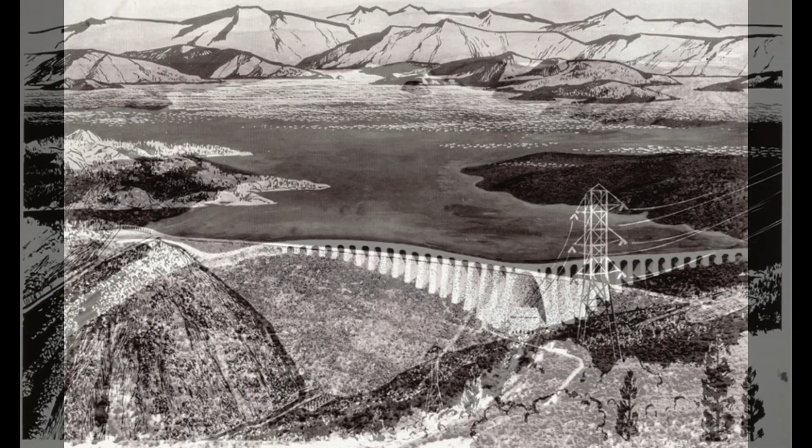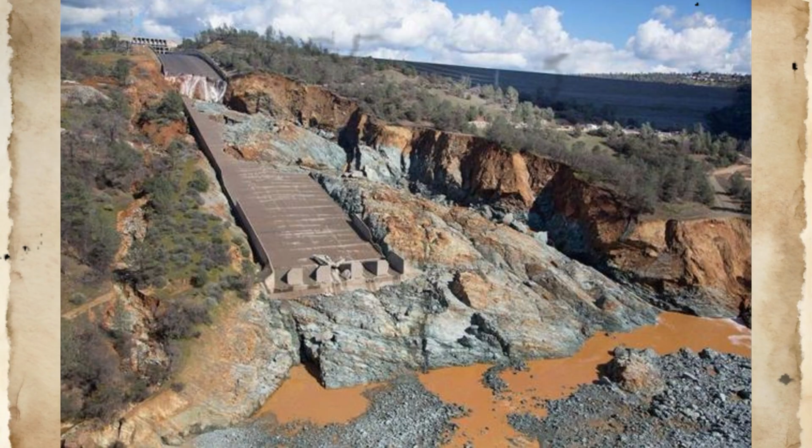The Oroville spillway had been constructed according to standard practices, concrete slabs placed over prepared bedrock, with drainage systems designed to relieve uplift pressures. These design assumptions, that subsurface drainage would remain functional, that bedrock preparation would prevent infiltration, that hydraulic forces would remain confined to surface channels, had governed construction decisions and operational protocols for 50 years.

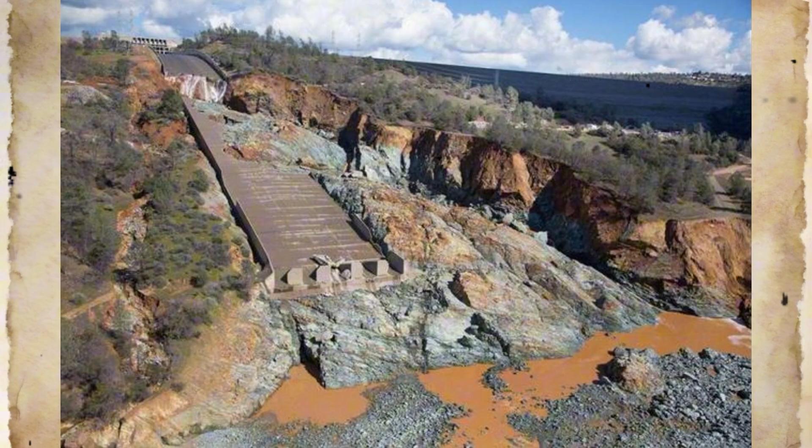But spillway concrete, like all infrastructure, ages. Joints develop microscopic separations. Drainage systems accumulate sediment. Water, under pressure and given sufficient time, exploits every available pathway.

When spillway discharge reached levels not seen since construction, water behavior departed from the controlled, surface flow that designers had modeled. The evacuation was ordered not because the dam would fail, but because water had begun rewriting the rules that governed spillway performance. How does infrastructure designed to prevent disaster become the mechanism that triggers it?

The Oroville Dam spillway system emerged from a specific engineering philosophy that dominated American dam construction in the 1960s. Flood control through massive concrete structures that could safely channel extreme water volumes while maintaining reservoir operations.

When California's Department of Water Resources began designing what would become the nation's tallest dam in 1957, the spillway represented the critical interface between controlled storage and uncontrolled discharge, a concrete pathway that would allow operators to prevent catastrophic overtopping by releasing water at rates up to 270,000 cubic feet per second.

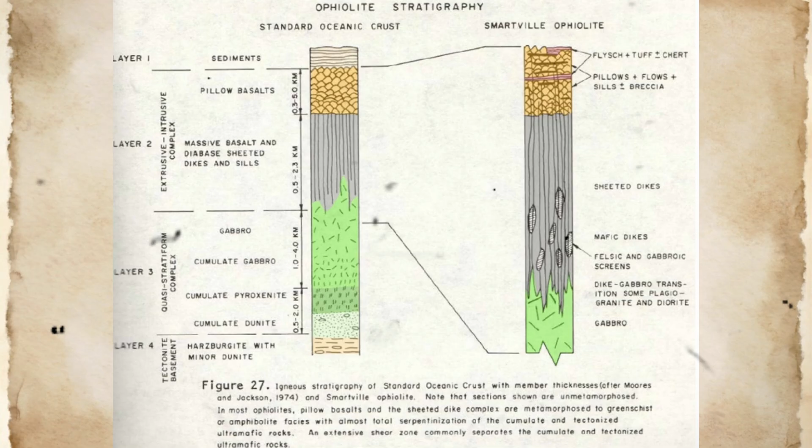The spillway's design reflected established Bureau of Reclamation principles that had governed major dam construction since the 1930s. Water would enter through radial gates controlled from a service bridge, flow down a concrete-lined chute inclined at carefully calculated angles, and dissipate energy in a stilling basin before rejoining the Feather River.

This approach assumed that concrete, properly placed over prepared bedrock, would contain hydraulic forces indefinitely. The design premise was straightforward. Water would remain on the surface of the spillway, following predetermined flow paths, with any uplift pressures safely relieved through engineered drainage systems embedded within the concrete structure.

The spillway chute itself extended 3,000 feet from the dam's outlet structure to the river below, dropping 730 feet in elevation. Engineering calculations determined that the chute required a specific concrete thickness, typically 12 to 18 inches, over a foundation of carefully prepared rock.

The bedrock beneath the spillway consisted of what geologists in the 1950s classified as metavolcanic rock, later redesignated as the Smartville ophiolite, a formation of weathered volcanic material that had undergone significant chemical alteration over geological time.

Critical to the spillway's function was an extensive drainage system designed to prevent water from accumulating beneath the concrete slabs. Herringbone patterns of terracotta drain pipes were embedded within the spillway structure, positioned just 5 to 6 inches below the concrete surface. These drains served a dual purpose.

They prevented uplift pressures from developing under the concrete during spillway operation, and they provided a pathway for any water that might penetrate the concrete surface to exit safely without compromising structural integrity. The design assumed several conditions that would prove critical to understanding the 2017 failure.

First, engineers expected that the concrete-to-bedrock interface would remain watertight, preventing significant subsurface water infiltration. Second, the embedded drainage system was expected to function indefinitely, providing reliable pressure relief throughout the spillway's operational life.

Third, the underlying bedrock was assumed to be sufficiently competent to support the concrete structure without degradation, despite geological evidence indicating the presence of weathered rock layers, or saprolite, in the spillway foundation area.

Spillway operations were governed by precise hydraulic calculations that determined safe discharge rates based on reservoir levels and downstream channel capacity. Operators relied on established protocols that prioritized gradual water releases to prevent sudden flow increases that might damage downstream infrastructure or endanger river communities.

The spillway gates could be operated individually or in combination, allowing operators to fine-tune discharge rates based on hydrologic conditions and flood control requirements. The operational philosophy emphasized predictability and control.

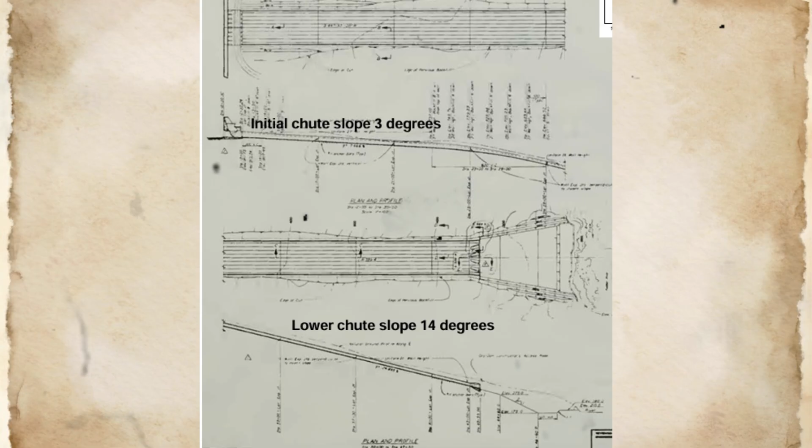Spillway flows were expected to behave according to well-understood hydraulic principles, with water velocities, depths, and energy dissipation occurring within calculated parameters. This predictability was essential for safe operation, as spillway discharge directly affected river levels, power generation at downstream facilities, and flood protection for communities throughout the Feather River Basin.

During normal operations, the spillway remained dry except during flood control releases or scheduled maintenance flows. This design choice reflected standard practice for flood control spillways, where structures remained inactive for extended periods between high water events. The assumption was that concrete structures could withstand both wet-dry cycling and the thermal stresses associated with intermittent use

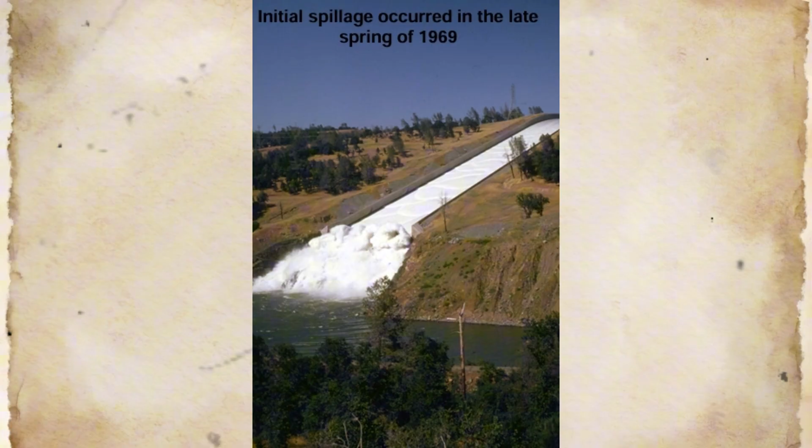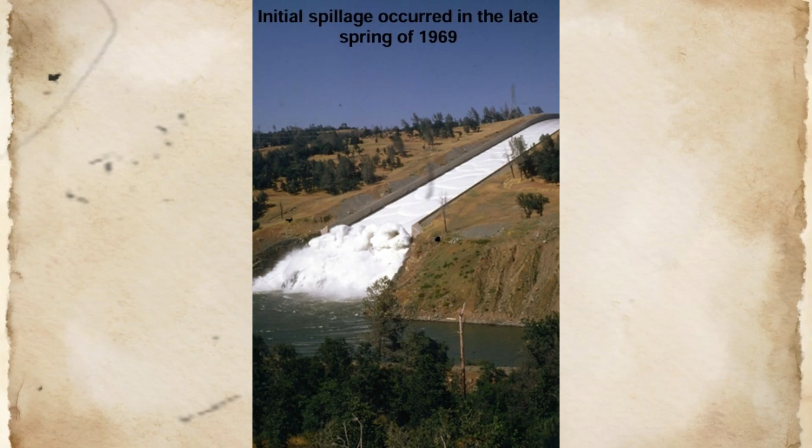without significant degradation. The spillway's auxiliary components included a separate emergency spillway, designed to operate only during extreme flood events when the main spillway reached capacity. This ungated structure consisted of a concrete weir that would allow water to flow over natural hillside terrain in a controlled manner. The emergency spillway represented a backup system, designed to prevent dam overtopping by providing an additional discharge pathway that could handle flows exceeding the main spillway's design capacity.

Instrumentation for monitoring spillway performance focused primarily on hydraulic parameters, flow rates, water levels, and gate positions. The system included limited provisions for monitoring the structural condition of the spillway chute itself. This instrumentation philosophy reflected the prevailing assumption that properly constructed concrete would perform reliably for the structure's design life without

requiring continuous structural monitoring. The spillway design incorporated safety factors intended to accommodate uncertainties in hydraulic loading, concrete performance, and foundation conditions. These factors were based on engineering judgment and experience with similar structures, rather than on comprehensive testing of the specific materials and conditions at Oroville. The safety margins were considered adequate for the range of operating conditions anticipated during the spillway's design life.

However, the design process occurred before modern understanding of several critical factors that would later prove relevant to spillway performance. In the 1960s, engineers had limited knowledge of alkali aggregate reactions in concrete, the long-term effects of wet-dry cycling on concrete durability, and the behavior of drainage systems subjected to decades of sediment infiltration. The design also preceded current understanding of how weathered volcanic rocks respond to sustained hydraulic loading and thermal cycling.

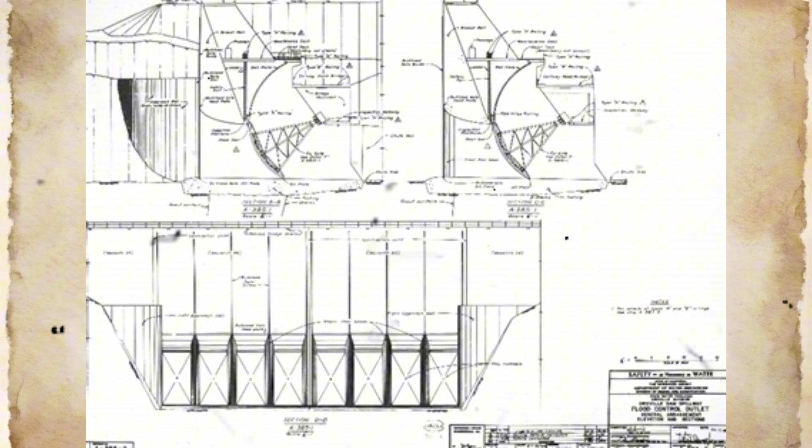The spillway's construction occurred between 1965 and 1968, during a period of unprecedented dam building activity in California. Quality control procedures followed established practices, with periodic testing of concrete strength and inspection of reinforcement placement. However, construction documentation from this period reveals limited attention to the long-term performance of embedded drainage systems or the detailed characterization of foundation rock properties below the prepared surface.

The completed spillway represented state-of-the-art flood control engineering for its time, incorporating established design principles and construction techniques that had proven successful at numerous other facilities. The structure met all applicable design standards and regulatory requirements, with approval from multiple engineering review boards and consulting panels assembled specifically for the Oroville project.

This design framework created the operational environment that would govern spillway performance for nearly 5 decades. Operators would make decisions based on hydraulic calculations that assumed structural integrity, while structural engineers would evaluate performance based on hydraulic loading assumptions that assumed predictable flow characteristics. The spillway system represented a carefully balanced engineering solution that depended on the continued validity of fundamental assumptions about concrete durability, foundation stability, and drainage system performance.

The implications of these design assumptions would not become apparent until February 2017, when prolonged spillway operation under conditions not encountered since the structure's completion would reveal the gap between design intent and physical reality. The spillway had been designed to handle water. It had not been designed to reveal what time, weather, and accumulated wear had done to the hidden infrastructure that made safe water handling possible.

The spillway system that operators inherited in 1968 contained vulnerabilities that would remain hidden for decades, embedded within design choices and maintenance practices that appeared entirely reasonable at the time of implementation. These latent conditions did not represent failures of engineering judgment, but rather the inevitable accumulation of small compromises and unexamined assumptions that would eventually align to create pathways for catastrophic failure.

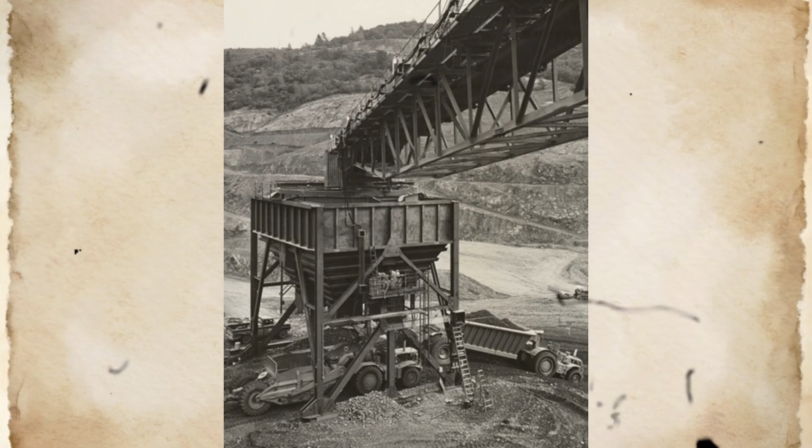The most significant latent condition involved the spillway's drainage system, which had been installed during construction with terracotta pipes positioned just inches below the concrete surface. These pipes, arranged in herringbone patterns throughout the chute, were designed to intercept any water that might penetrate the concrete and channel it safely away from the structure. However, the drainage system's effectiveness depended on maintaining clear flow paths over operational timeframes that exceeded the experience base of

any existing spillway. By the 1980s, routine inspections began documenting evidence of drainage system degradation. Sediment infiltration had partially blocked some drain outlets, reducing the system's capacity to relieve uplift pressures. More concerning, chemical analysis revealed that some terracotta pipes were experiencing material degradation due to prolonged exposure to alkaline conditions created by concrete chemistry. The pipes were slowly dissolving, creating void spaces within the spillway structure that operators could not directly observe.

This drainage system deterioration created a hidden vulnerability that contradicted fundamental design assumptions. Engineers had calculated spillway safety factors based on the assumption that uplift pressures would be reliably relieved through functional drainage. As drainage capacity decreased, the actual safety margins were being eroded in ways that could not be detected through surface inspection or standard hydraulic monitoring.

Maintenance procedures during the spillway's operational life focused primarily on concrete surface repairs and gate mechanism servicing. These activities followed established protocols for dam maintenance, emphasizing visible components and mechanical systems that could be tested and verified. However, the embedded drainage system lay beyond the reach of routine maintenance, accessible only through expensive and disruptive excavation that was never authorized during the spillway's first 4 decades of operation.

The maintenance philosophy reflected broader organizational assumptions about concrete infrastructure durability. Concrete structures were expected to provide decades of reliable service with minimal intervention, a belief supported by experience with other major dams constructed during the same period. This confidence in concrete permanence discouraged intensive investigation of subsurface conditions, particularly when surface inspections revealed no obvious signs of distress.

Organizational factors within the California Department of Water Resources further contributed to the accumulation of latent conditions. Budget constraints during the 1980s and 1990s led to deferral of comprehensive structural assessments that might have revealed drainage system problems earlier. Engineering staff turnover meant that institutional knowledge about construction details and early operational experience was gradually lost, replaced by procedural compliance that emphasized routine inspections over fundamental system evaluation.

The regulatory environment also shaped maintenance priorities in ways that inadvertently masked emerging problems. Federal guidelines for dam safety focused primarily on structural stability and flood control performance, with less emphasis on the detailed condition of auxiliary systems like spillway drainage. Compliance inspections verified that the spillway could discharge required flow volumes and that concrete surfaces showed no obvious cracking, but they did not mandate investigation of subsurface infrastructure condition.

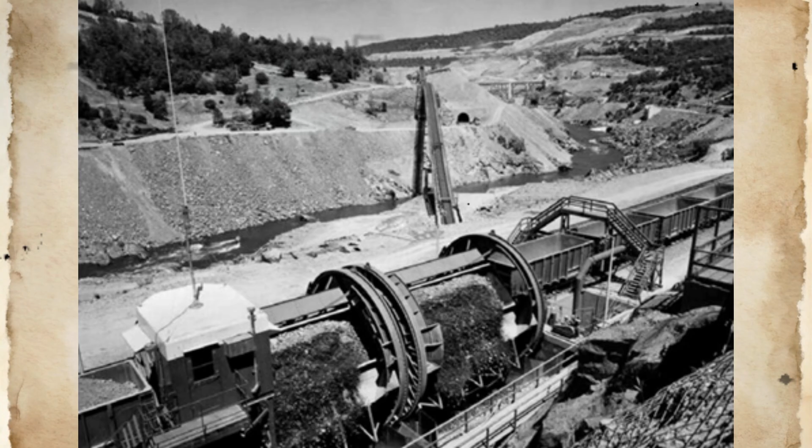The spillway's instrumentation system compounded these organizational limitations by providing extensive data on hydraulic performance while offering minimal information about structural condition. Operators could precisely monitor flow rates and water pressures, but they had no direct means of assessing the integrity of the drainage system or the condition of the concrete bedrock interface. This instrumentation bias reinforced the operational focus on hydraulic control while maintaining structural assumptions that were becoming increasingly questionable.

Documentation practices during routine maintenance activities inadvertently obscured evidence of emerging problems. Work orders typically focused on specific repair tasks rather than comprehensive condition assessment, creating records that captured individual symptoms without revealing systematic deterioration patterns. When maintenance crews repaired surface cracks or replaced concrete sections, these activities were documented as routine improvements rather than responses to underlying structural changes.

The spillway's design had also created a maintenance trap through its herringbone drainage system configuration. The intricate network of buried pipes made comprehensive inspection extremely difficult, while the system's distributed nature meant that partial blockages might not significantly affect overall spillway performance until deterioration became widespread. Operators could not easily distinguish between normal operational variations and the gradual degradation of critical subsurface infrastructure.

Seasonal operation patterns further masked the progression of structural deterioration. The spillway operated primarily during winter flood seasons, remaining dry for extended periods between high water events. This intermittent use pattern meant that emerging problems might not become apparent until spillway discharge reached levels that had not been sustained for years or decades. The wet-dry cycling also created thermal and chemical stresses that accelerated material degradation in ways that were poorly understood when the spillway was designed.

Professional culture within the dam engineering community contributed to delayed recognition of spillway vulnerabilities. Engineers naturally focused on demonstrated performance rather than speculative failure modes, particularly when structures had operated successfully for decades. The spillway's reliable flood control performance during major storms in the 1980s and 1990s reinforced confidence in the design approach, discouraging investigation of theoretical problems that had no obvious operational impact.

The accumulation of these latent conditions created a situation where the spillway's apparent reliability masked fundamental changes in its structural behavior. Surface inspections continued to show acceptable concrete condition, hydraulic performance remained within design parameters, and flood control operations proceeded according to established procedures. However, the hidden infrastructure that made this performance possible was gradually failing in ways that would not become apparent until extreme operating conditions exposed the accumulated degradation.

By 2017, nearly 50 years after construction, the spillway represented a complex system where original design assumptions no longer accurately reflected physical reality. The drainage system that was supposed to prevent uplift pressures had been compromised by decades of sediment infiltration and material degradation. The bedrock foundation that was expected to provide stable support had been altered by prolonged exposure to water infiltration and thermal cycling.

The concrete structure that appeared sound from surface inspection was underlain by void spaces and weakened interfaces that contradicted engineering calculations. These latent conditions had not triggered any obvious warning signs that would have prompted immediate corrective action. The spillway continued to perform its primary function of discharging flood flows, and routine inspections found no evidence of imminent failure. The hidden deterioration was only detectable through comprehensive subsurface investigation that had never been undertaken, due to cost considerations and confidence in the original design.

The stage was set for a failure mode that would combine hydraulic forces with structural vulnerabilities in ways that the original design had not anticipated. When sustained spillway operation finally occurred in February 2017, the accumulated effects of decades of hidden deterioration would interact with hydraulic loading to create conditions that overwhelmed the spillway's compromised structural capacity.

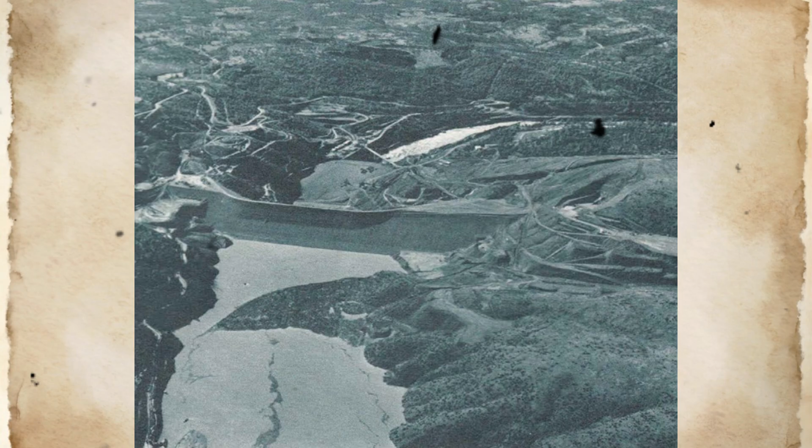The winter of 2016 to 2017 brought California unprecedented rainfall following years of severe drought. By late January 2017, Oroville Reservoir had risen from critically low levels to near capacity, forcing operators to begin sustained spillway releases for the first time since 1997. What appeared to be routine flood control operation would reveal the accumulated effects of decades of hidden infrastructure degradation.

On February 6, 2017, spillway operators began controlled releases at approximately 25,000 cubic feet per second to manage rising reservoir levels. Flow rates remained well within design parameters, and hydraulic conditions appeared entirely normal. Water entered through the radial gates, accelerated down the concrete chute, and dissipated energy in the stilling basin exactly as engineering calculations predicted. Surface observations revealed no unusual conditions, and operators had no reason to suspect that anything other than routine flood control was occurring.

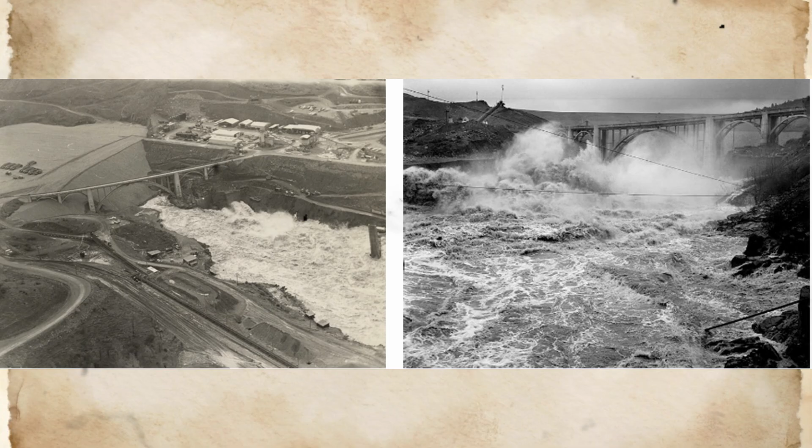However, beneath the spillway's concrete surface, conditions were departing significantly from design assumptions. The sustained flow was creating hydraulic pressures that the compromised drainage system could no longer adequately relieve. Water began infiltrating through concrete joints and microcracks that had developed over decades of thermal cycling and chemical exposure. This infiltration process was invisible to operators, who had no instrumentation capable of detecting subsurface water accumulation.

The infiltrating water encountered foundation conditions that differed substantially from what engineers had assumed during design. Instead of competent bedrock capable of supporting the concrete structure indefinitely, the water reached layers of saprolite, weathered volcanic rock that had been chemically altered by geological processes over millions of years. This material, which appeared stable when dry, became highly erodible when saturated and subjected to hydraulic pressure.

For several days, spillway operation continued without obvious incident. Operators maintained discharge rates according to established flood control protocols, responding to rising reservoir levels by gradually increasing flow through additional gate openings. The spillway appeared to perform exactly as designed, handling increasing water volumes while maintaining controlled downstream releases. Hydraulic monitoring showed flow rates, velocities, and energy dissipation occurring within expected parameters.

The divergence between apparent performance and actual structural condition became critical on February 7, when operators increased spillway discharge to approximately 52,000 cubic feet per second. This flow rate, while still well below the spillway's design capacity, created hydraulic conditions that had not been sustained since the structure's completion in 1968. The increased discharge generated higher pressures throughout the spillway system, including uplift pressures beneath the concrete that the degraded drainage system could not adequately manage.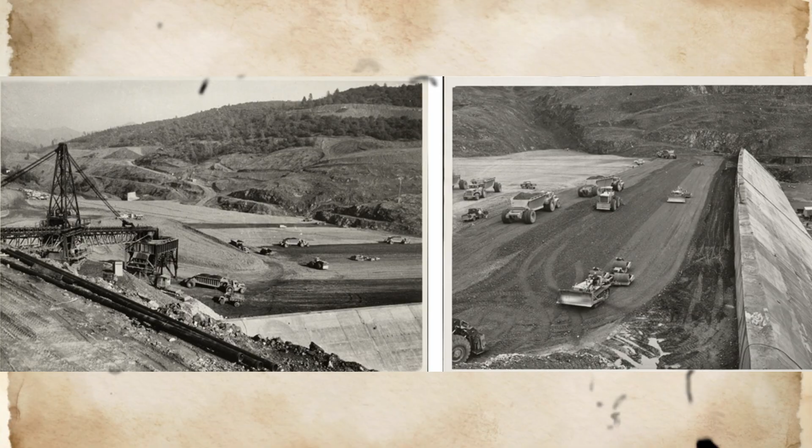Continuing operation might worsen whatever structural problem was developing, but shutting down the spillway would force reservoir levels higher, potentially requiring use of the untested emergency spillway. At 11:55 a.m. on February 7th, operators made the decision to shut down the main spillway to allow detailed inspection of the observed anomaly. This decision reflected prudent caution based on available information, but it also initiated a sequence of events that would reveal the full extent of infrastructure deterioration.

When spillway flow ceased, the true scale of subsurface erosion became visible for the first time. The sudden cessation of water flow exposed a massive crater where concrete had been undermined and foundation material had been eroded away. The crater extended approximately 300 feet in length and 170 feet in width, reaching depths of up to 40 feet below the original spillway surface. The scale of the erosion indicated that subsurface deterioration had been progressing for some time before becoming visible, hidden by the flowing water that had masked the developing cavity.

More alarming was the discovery that the erosion had extended well beyond the concrete spillway structure itself, penetrating deep into the hillside that supported the spillway chute. The eroded material included not only saprolite foundation layers, but also structural fill that had been placed during original construction. This extensive erosion suggested that the spillway's structural integrity had been fundamentally compromised in ways that could not be quickly repaired. The crater's configuration revealed the mechanism of failure with stark clarity.

Water infiltration through degraded concrete joints had reached the saprolite foundation, where sustained hydraulic pressure had initiated progressive erosion. The compromised drainage system had been unable to intercept this infiltration, allowing water to accumulate at the concrete-bedrock interface where it generated uplift pressures that exceeded structural capacity. Once erosion began, the flowing water accelerated the process by removing material and creating increasingly large void spaces beneath the concrete.

Inspection of the exposed crater also revealed evidence that the failure process had been developing gradually, rather than occurring suddenly. Multiple layers of eroded material showed distinct stages of deterioration, indicating that foundation erosion had been progressing through successive wet seasons without detection. The final catastrophic exposure represented the culmination of a process that had been undermining spillway integrity for an extended period.

The implications of this discovery extended far beyond the immediate structural damage. The spillway failure had occurred during relatively modest flood conditions, at flow rates representing only a fraction of the structure's design capacity. This suggested that the spillway's actual structural capacity had been reduced far below design assumptions through the accumulated effects of infrastructure degradation. More critically, the failure had developed without triggering any of the monitoring systems or visual indicators that operators relied upon to assess spillway condition.

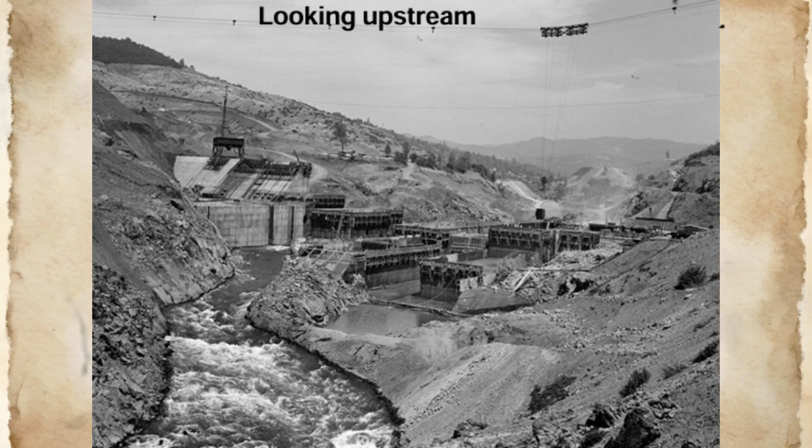Operations staff now confronted a situation that had not been anticipated in any emergency procedure. The main spillway was structurally compromised and could not safely operate, but reservoir levels continued rising due to ongoing storm inflows. The emergency spillway, which had never been used and was not designed for sustained operation, represented the only remaining option for reservoir control. However, activating the emergency spillway would create new risks, as this auxiliary system had its own limitations and potential failure modes.

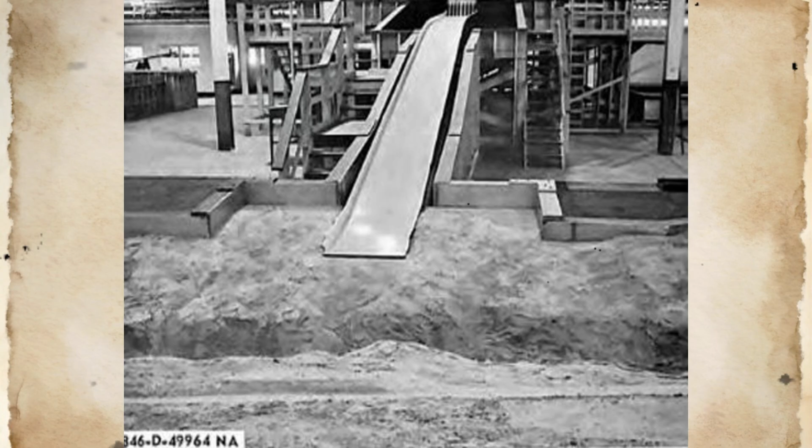The divergence between operator expectations and physical reality was now complete. The spillway that had appeared to function normally just hours earlier was revealed to be structurally compromised beyond immediate repair. The infrastructure that operators had trusted to provide reliable flood control had been silently degrading for years, maintaining an appearance of competence while losing the capacity to perform safely under sustained loading. The failure exposed not just physical deterioration, but the inadequacy of inspection and monitoring systems that had failed to detect the progressive loss of structural integrity.

The massive crater exposed by the spillway shutdown revealed a failure mechanism that contradicted fundamental engineering assumptions about concrete infrastructure behavior. The erosion pattern provided forensic evidence of how water infiltration, foundation deterioration, and structural uplift had combined to create catastrophic undermining that remained invisible until the moment of exposure. Understanding this failure chain required reconstructing the physics of progressive deterioration that had been developing beneath the spillway surface for decades. The failure originated at the interface between concrete and bedrock, where design assumptions about waterproof bonding had proven incorrect over operational timeframes.

Concrete placement during the 1960s had followed standard procedures for achieving adhesion to prepared rock surfaces, but these procedures did not account for the long-term effects of thermal cycling, chemical exposure, and micro-movement that gradually compromised the bond integrity.

Seasonal temperature variations caused differential expansion between concrete and rock, creating microscopic separations that allowed water infiltration during subsequent spillway operations. This infiltration process accelerated during periods of sustained spillway discharge, when hydraulic pressure forced water into any available pathway

through the concrete structure. The compromised drainage system, originally designed to intercept such infiltration, had been rendered ineffective by decades of sediment accumulation and terracotta pipe deterioration. Instead of being safely channeled away, infiltrating water accumulated at the concrete-rock interface where it generated uplift pressures that the original design had assumed would never occur.

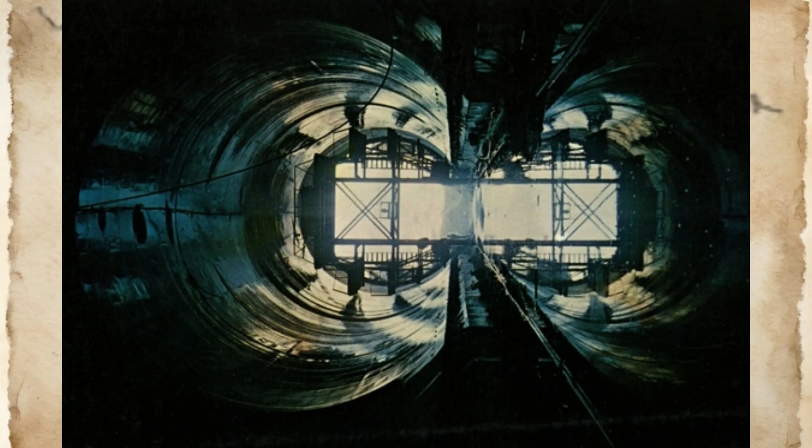The bedrock beneath the spillway consisted of saprolite, developed from the Smartville ophiolite, a geological formation that exhibited dramatically different properties when saturated compared to its dry state. During design and construction, this material had appeared competent and stable, supporting engineering confidence in long-term foundation performance.

However, when subjected to sustained hydraulic pressure from accumulated infiltration, the saprolite became highly erodible, losing structural integrity through chemical dissolution and particle transport. The erosion mechanism followed a predictable progression once critical conditions were established.

Water infiltration created hydraulic pressure at the concrete-saprolite interface, initially causing minor material displacement in the most chemically altered zones. As small amounts of saprolite were removed, the resulting void spaces allowed greater water accumulation, which increased hydraulic pressure and accelerated erosion rates. This positive feedback process continued beneath the concrete surface, creating progressively larger cavities that undermined structural support.

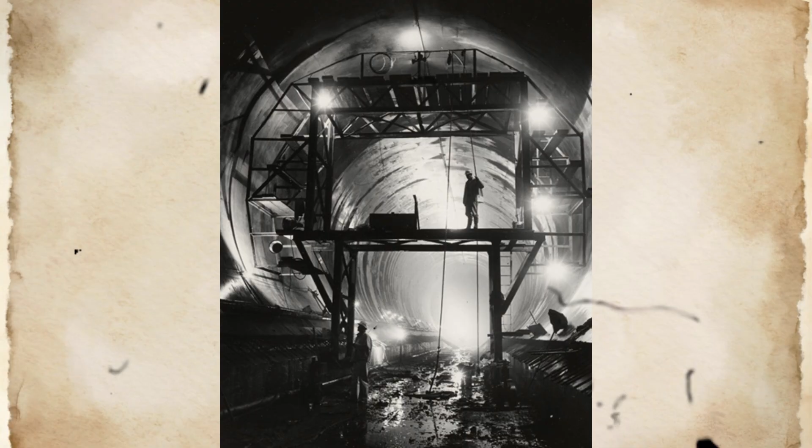The concrete structure above this developing erosion initially maintained its structural integrity through beam action, spanning across void spaces without obvious surface distress. However, as erosion expanded both laterally and vertically, the unsupported concrete spans exceeded their structural capacity. The final crater formation occurred when concrete slabs, no longer adequately supported by underlying foundation, collapsed into the eroded cavity beneath.

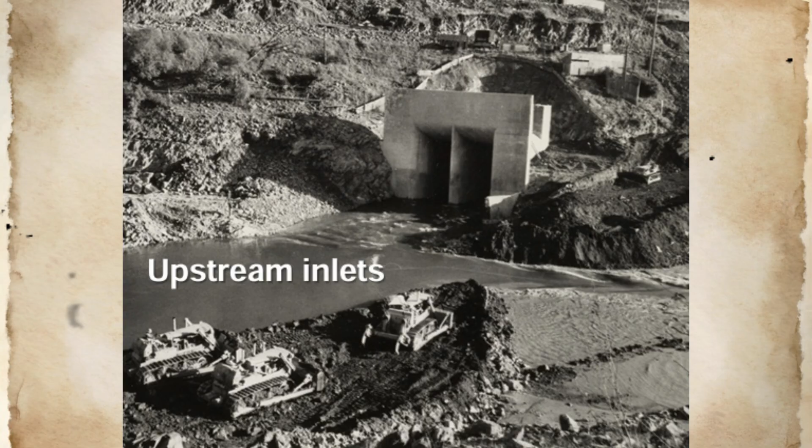Forensic analysis of the exposed crater revealed multiple generations of erosion activity, indicating that the failure process had been episodic rather than continuous. Different layers of eroded material showed distinct characteristics corresponding to various spillway operations over the structure's operational history. Earlier erosion events had removed chemically altered saprolite, while more recent activity had penetrated deeper into more competent rock layers as hydraulic pressure increased with accumulated void volume.

The crater's asymmetric configuration provided additional evidence of how water flow patterns had influenced erosion development. The upstream end of the crater showed deeper excavation where hydraulic pressure was highest, while the downstream extent followed natural drainage patterns in the underlying rock structure. This erosion pattern confirmed that subsurface water movement had been controlled by geological features that were not fully characterized during original design investigations.

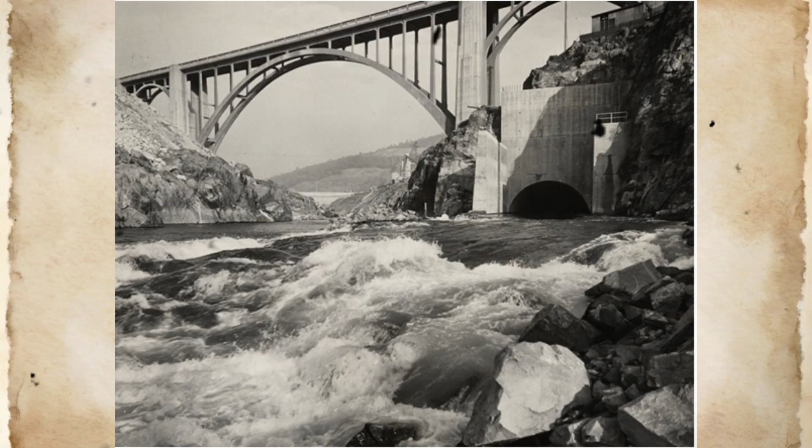Measurement of the eroded volume revealed the scale of material removal that had occurred without detection. Approximately 1.5 million cubic feet of foundation material had been removed from beneath the spillway structure, creating void spaces that extended up to 180 feet beyond the original concrete edges. This massive erosion had progressed through multiple spillway operations without triggering any monitoring system or visual indicator that might have warned operators of developing structural compromise.

The timing of final crater exposure corresponded with hydraulic conditions that exceeded a critical threshold for continued concrete structural integrity. When spillway discharge reached 52,000 cubic feet per second on February 7, the combination of increased hydraulic pressure and reduced foundation support created conditions where the remaining concrete structure could no longer maintain stability. The visible water emergence that prompted operator concern represented the point where internal hydraulic pressure overcame the concrete's capacity to contain subsurface flow.

Temperature measurements taken after crater exposure revealed additional evidence of the failure mechanism. Thermal imaging showed that water temperatures in the eroded cavity were several degrees warmer than spillway surface flow, indicating that the subsurface water had been in contact with the foundation for extended periods. This thermal signature supported the conclusion that water infiltration and accumulation had been occurring long before the final structural failure.

Chemical analysis of water samples from the crater provided further forensic evidence of progressive foundation deterioration. Dissolved mineral content significantly exceeded levels typical of surface spillway flow, confirming extensive chemical interaction between infiltrating water and saprolite foundation materials. The specific mineral composition indicated that chemical dissolution had been occurring over time frames consistent with years rather than days of water-rock contact.

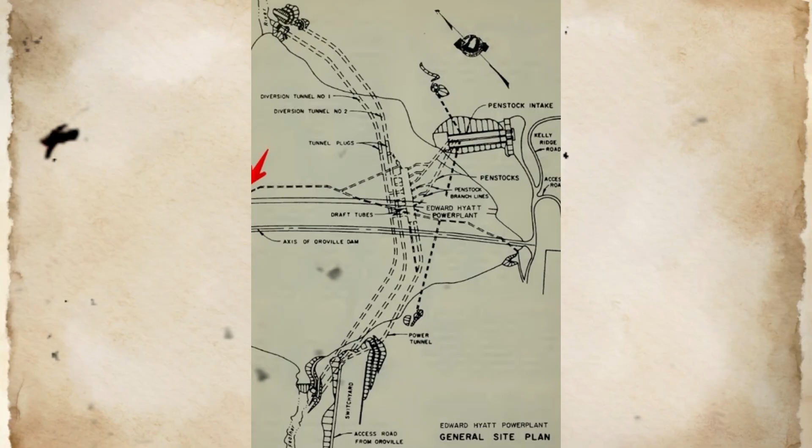The failure mechanism also explained why routine spillway inspections had failed to detect developing problems. Surface-based visual inspection could not penetrate the concrete structure to assess subsurface conditions, while the spillway's hydraulic performance remained within acceptable parameters despite progressive foundation erosion.

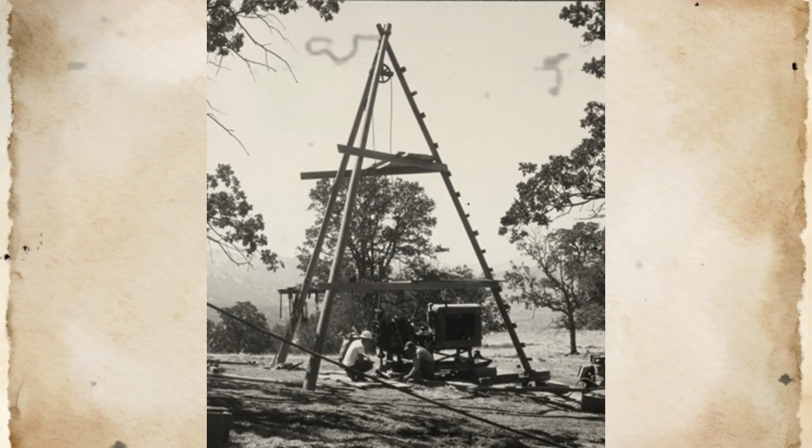The structural deterioration had been occurring in a zone that was inaccessible to conventional monitoring techniques and had not yet affected the spillway's primary function of discharging water.

Structural calculations performed after crater exposure revealed how dramatically the spillway's load-carrying capacity had been reduced by foundation erosion. The concrete slabs that had appeared structurally adequate when assumed to be fully supported were actually operating far beyond their design limits as they spanned across growing void spaces. The factor of safety that engineers had incorporated into the original design had been completely eliminated by foundation deterioration that was not anticipated in design calculations.

The physics of the failure also demonstrated why the erosion process had accelerated rather than stabilizing over time. Unlike surface erosion, which typically reaches equilibrium as resistant materials are exposed, the subsurface erosion at Oroville had encountered progressively more vulnerable foundation conditions as it penetrated deeper into chemically altered rock layers. Each erosion cycle had created conditions that facilitated more extensive deterioration during subsequent spillway operations.

Analysis of spillway flow conditions during the failure development revealed another critical factor. The sustained discharge rates that triggered final failure were not extreme by historical standards, but they represented the longest continuous operation at moderate flow rates in the spillway's operational history. Previous spillway operations had typically involved higher peak flows for shorter durations, which had not provided sufficient time for the progressive hydraulic pressure accumulation that ultimately caused foundation failure.

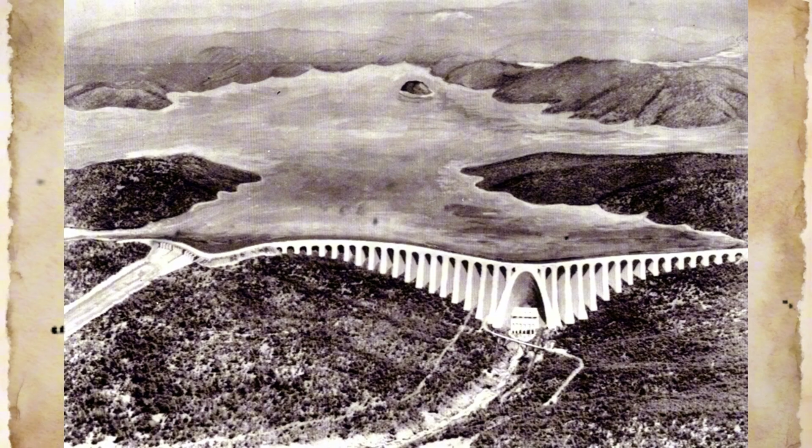On February 11, 2017, at approximately 8:00 a.m., Lake Oroville reached elevation 901 feet, triggering automatic overflow through the emergency spillway for the first time in the structure's operational history. Initial flow rates were relatively modest, approximately 1,000 cubic feet per second, but the psychological impact was enormous. The emergency spillway's activation represented acknowledgement that the primary flood control system had failed and that dam safety now depended on an auxiliary system with unknown performance characteristics.

Emergency spillway operation initially proceeded without obvious problems. Water flowed smoothly over the concrete weir and began its descent down the natural hillside channel toward the river. However, operators and engineering staff immediately recognized that sustained operation at higher flow rates could create new failure modes that were potentially more dangerous than the main spillway crater. The emergency spillway channel consisted of natural soil and rock that had not been designed to withstand the erosive forces of high-velocity water flow.

As reservoir levels continued rising, emergency spillway discharge increased proportionally, reaching approximately 12,500 cubic feet per second by February 12. This flow rate generated water velocities and erosive forces that began visibly altering the natural channel configuration. Aerial surveillance revealed progressive erosion at multiple locations along the emergency spillway channel, with particular concern focused on areas where the channel curved or encountered variations in soil conditions.

The most critical vulnerability became apparent when engineers recognized that continued emergency spillway erosion could potentially undercut the concrete weir structure itself. The weir had been constructed with relatively shallow foundations, adequate for its intended function as an emergency overflow structure but not designed to withstand the foundation erosion that sustained high-flow operation might produce. Loss of the emergency spillway weir would eliminate controlled overflow, forcing uncontrolled overtopping of the dam's main embankment.

Engineering calculations revealed the catastrophic potential of this failure progression. If emergency spillway erosion compromised the weir structure, reservoir levels would continue rising until water began flowing over the earthen dam embankment itself. Earthen dams are not designed to withstand overtopping flows, and such conditions typically result in rapid embankment failure and uncontrolled reservoir release. The potential failure of Oroville Dam would threaten hundreds of thousands of downstream residents with little warning time for evacuation.

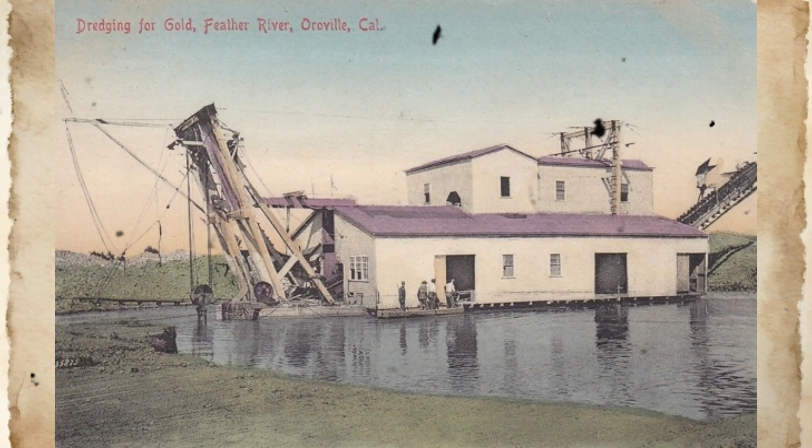The stabilization period also revealed how infrastructure failure could cascade beyond the immediate facility. Massive spillway discharges, whether through the damaged main spillway or the erosion-prone emergency spillway, created downstream flooding concerns that complicated operational decisions. Communities along the Feather River experienced unprecedented flow rates that threatened levee systems and required evacuations based on flood projections rather than dam failure scenarios. Public communication during the stabilization attempts highlighted the challenge of explaining complex engineering uncertainties to populations facing potential evacuation.

Officials struggled to convey that the dam itself remained structurally sound while acknowledging that spillway failures created risks that could not be precisely quantified. The technical distinction between spillway failure and dam failure was crucial for engineering assessment, but proved difficult to communicate effectively to concerned residents.

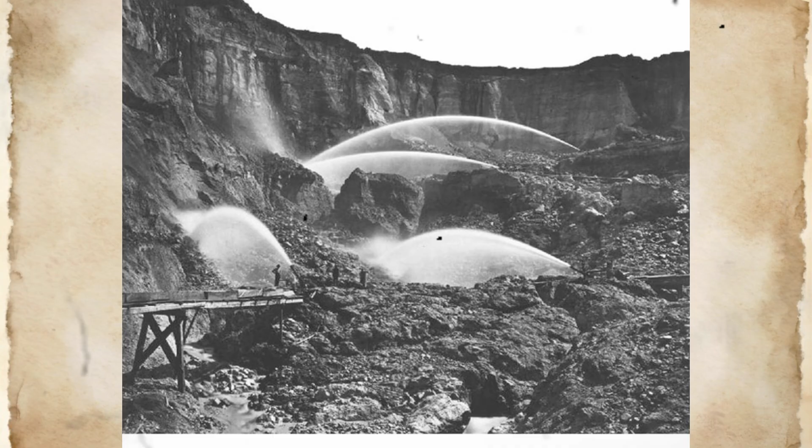By February 13th, intensive spillway operation had succeeded in reducing reservoir levels below the emergency spillway activation point, providing temporary relief from the most immediate failure threats. However, this achievement came at the cost of further devastating the main spillway infrastructure and demonstrating that the emergency spillway could not be relied upon for sustained operation.

The stabilization had been achieved, but at the cost of revealing that Oroville Dam's flood control capability had been fundamentally compromised. The emergency also exposed the vulnerability of California's water supply system to infrastructure failure. Oroville Dam represented a critical component of the State Water Project, and its impaired flood control capability had implications extending far beyond immediate dam safety. The spillway failures had revealed systemic risks in aging infrastructure that had been assumed to provide reliable service indefinitely.

The months following the emergency revealed the full scope of infrastructure deterioration, through comprehensive forensic investigation that had never been undertaken during the spillway's operational life. Advanced geotechnical exploration, including deep drilling and ground-penetrating radar, exposed foundation conditions that contradicted every assumption upon which the spillway's design had been based. The investigation findings would fundamentally alter understanding of concrete infrastructure durability and establish new protocols for monitoring aging dam systems.

Core samples extracted from the spillway foundation revealed extensive saprolite development throughout the bedrock that had been classified as competent during original construction. Geological analysis showed that chemical weathering had penetrated far deeper into the Smartville ophiolite than 1960s investigation techniques could detect. In some areas, chemically altered rock extended more than 100 feet below the original spillway foundation, creating conditions where any significant water infiltration would inevitably lead to progressive erosion and structural undermining.

The investigation also exposed regulatory gaps that had allowed critical infrastructure deterioration to progress without intervention. Existing dam safety regulations focus primarily on structural stability and flood control performance, with minimal requirements for assessing the condition of auxiliary systems like spillway drainage. The regulatory framework assumed that properly constructed concrete infrastructure would provide reliable service throughout its design life, an assumption that the Oroville failure demonstrated to be incorrect.

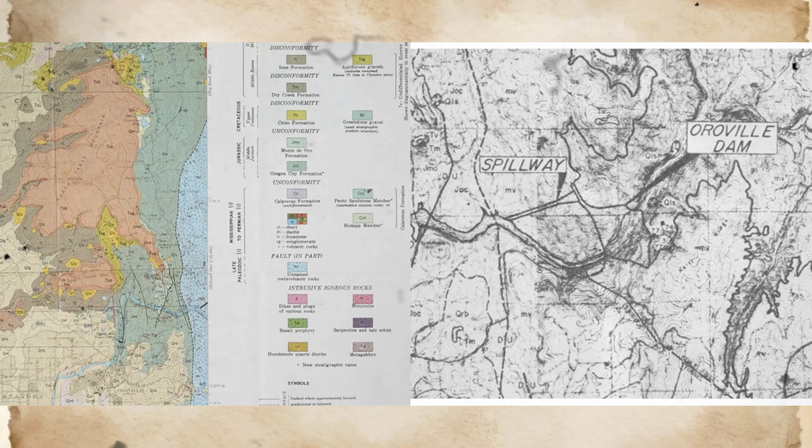Professional engineering practices underwent significant revision as the forensic findings were disseminated throughout the dam safety community. The traditional approach to spillway design, which emphasized hydraulic performance with structural components assumed to be permanent, was replaced by integrated design philosophies that explicitly considered infrastructure aging and deterioration over operational timeframes. New design standards required consideration of maintenance access, component replacement, and long-term monitoring as essential elements of spillway systems.

The economic implications of the forensic findings extended far beyond the immediate costs of Oroville reconstruction. Analysis revealed that similar vulnerabilities likely existed at numerous other dam facilities constructed during the same era, using similar design approaches and materials. The need for comprehensive infrastructure assessment and potential reconstruction at multiple facilities represented investment requirements that had not been anticipated in long-term water management planning.

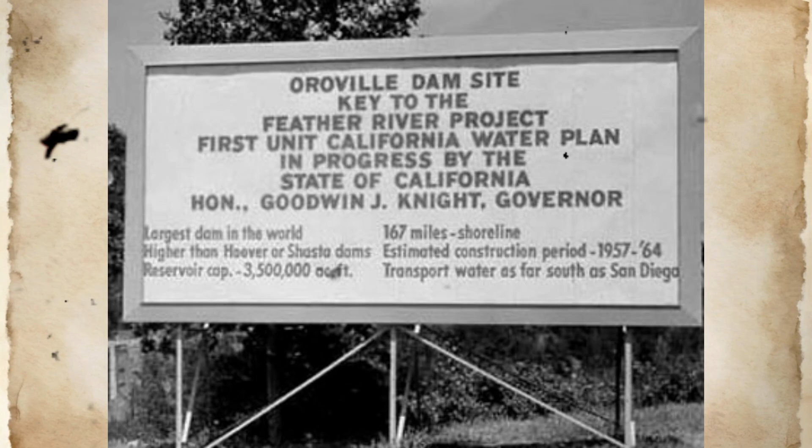Reconstruction of the Oroville spillway incorporated lessons learned from the failure investigation, but also revealed the complexity of applying new knowledge to existing infrastructure systems. The new spillway design included extensive foundation treatment, redundant drainage systems, comprehensive instrumentation, and construction techniques that address the specific failure modes identified through forensic analysis. However, integration of these improvements with existing dam infrastructure required engineering solutions that had no precedent in conventional practice.

The reconstructed spillway began operation in 2019, incorporating monitoring systems that provided real-time data on foundation conditions, drainage system performance, and structural behavior. This instrumentation revealed spillway behavior characteristics that had been invisible to operators for decades, including seasonal variations in foundation pressure, thermal effects on structural performance, and the gradual evolution of concrete properties under operational loading. The data confirmed that spillway systems were far more dynamic than original design assumptions had recognized.

Long-term monitoring of the reconstructed facility provided validation of forensic conclusions about the original failure mechanism. Instrumentation data showed that even with improved foundation treatment and drainage systems, spillway operations created subsurface pressure variations and material stresses that required continuous monitoring to ensure safe performance. The monitoring confirmed that spillway safety depended on active management of infrastructure condition rather than passive reliance on structural permanence.

The Oroville investigation ultimately demonstrated that infrastructure failure had not resulted from negligence, inadequate maintenance, or design error within the context of 1960s engineering practice. Instead, the failure represented the inevitable consequence of operating complex infrastructure beyond the timeframes and conditions for which fundamental design assumptions remained valid. The spillway had been designed according to established engineering principles that proved inadequate for managing infrastructure aging over operational periods that exceeded the experience base of any previous facility.

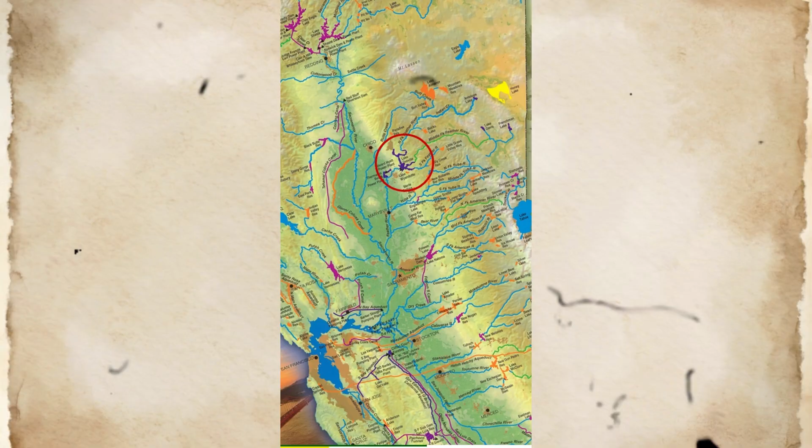The systemic lesson extended beyond spillway engineering to encompass broader principles of infrastructure management in aging systems. The investigation revealed that infrastructure reliability could not be maintained through routine inspection and maintenance alone, but required comprehensive assessment of hidden components, continuous monitoring of performance parameters, and periodic reconstruction based on evolving understanding of material behavior and system performance. The forensic evidence established that the Oroville spillway failure was not an isolated incident, but rather a preview of challenges that would increasingly confront aging infrastructure systems throughout the United States.

The investigation findings provided a framework for identifying and addressing similar vulnerabilities before they resulted in emergency conditions, but also revealed the magnitude of investment required to maintain infrastructure reliability in systems that had been assumed to provide permanent service.

The earthen monolith at Oroville, the tallest dam in the United States, never cracked, never shifted, never came close to collapse. Its core assumptions held. Its embankment resisted the rising reservoir exactly as designed. From a distance, the structure that symbolized California's water security appeared calm, immovable, almost indifferent to the chaos unfolding around it. And yet, on February 12, 2017, nearly 190,000 people were told to leave their homes.

They fled not because the dam was failing, but because the system built to protect the dam had quietly lost its authority over water. The evacuation order marked the moment when engineering certainty gave way to uncertainty, when officials could no longer guarantee that the remaining barriers between a full reservoir and downstream communities would hold.